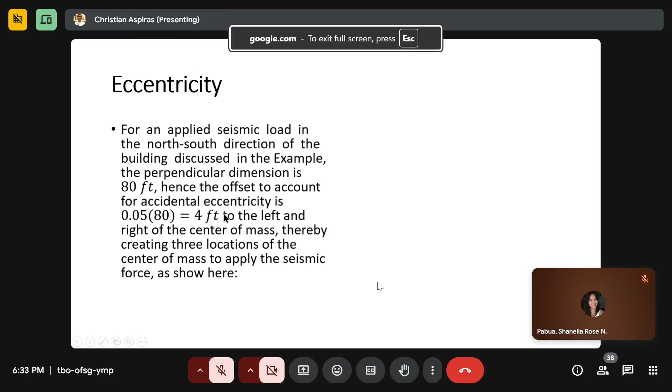So hence the eccentricity is the distance from the center of rigidity. Moment arm as follows. Eccentricity 1.

Once again, eccentricity is the difference or the distance between the center of mass and the center of rigidity. Tulo ka bukang ato, center of mass 31.3 feet minus center of rigidity, 26 feet. So una na itong eccentricity, 5.3 feet.

Eccentricity 2, 35.3, minus the center of rigidity, 26. So 9.3 feet.

And then lastly, 39.3 minus rigidity, 13.3, right? So tulo ka bukang ato ang eccentricity class, no?

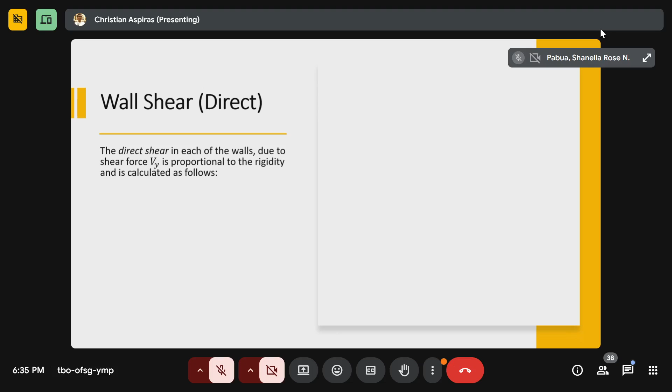So tagsa na to class, unahon na to ning wall shear or direct wall shear, okay? Direct wall shear or the direct shear. The direct shear in each of the walls due to shear force Vy is proportional to the rigidity and is calculated as follows.

Okay, kani? Vy multiply sa ratio between the rigidity, the rigidity divided by the total rigidity.

Rigidity, kaning rigidity is rigidity of the kanang wall, each wall. Maupod sa kanang wall nga perpendicular. This is the wall for the perpendicular wall, at the perpendicular nga wall sa force Vy, shear force Vy. So duha na sa class, direct o perpendicular.

Now, ang rigidity ani this kaning rigidity is zero gini siya actually, di ba? Kay nagsabot naman tadaan na to nga basta the rigidity or the wall is perpendicular sa shear force nga ga-act, ang rigidity nato ana is zero. Taken conservatively as zero. So that means kani nga direct shear is zero ni siya actually.

So sum of Riy and sum of Rix only include the sum of rigidities of the walls that are parallel to the line of force applied. Walls that are perpendicular to the applied force have a rigidity of zero and are not included.

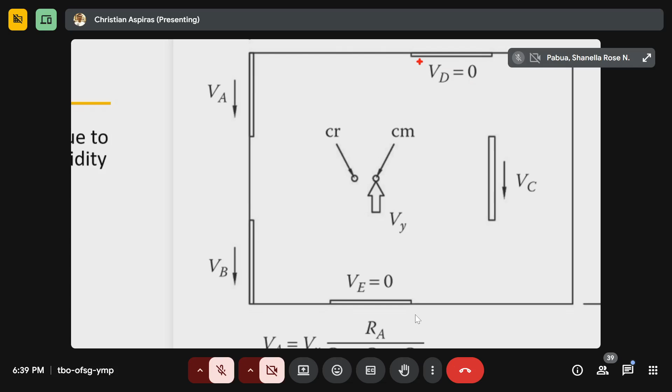So kung ang atong Vy is acting in a north-south direction, paana? Ang force sa Vy, ang makaresistra nga walls are VA, VB, ug VC. While VD ug VE are both zero sa class.

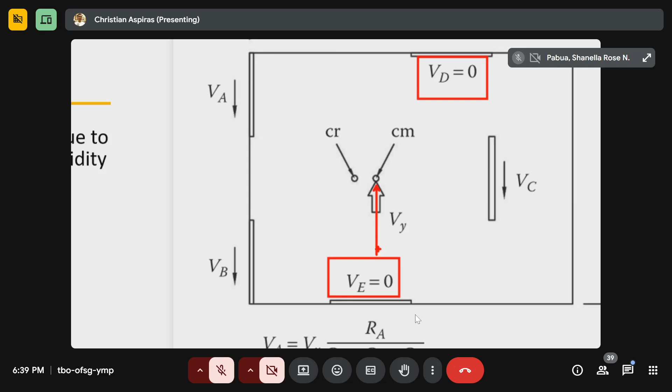Diba? With in terms of kani Vy. Right? So mana sa kaninga example, so kanira ang naay shear, direct shear, direct shear.

So kani siya muna siya ang expanded formula for VA, for VB and VC. No wall A, wall B and wall C. Alright?

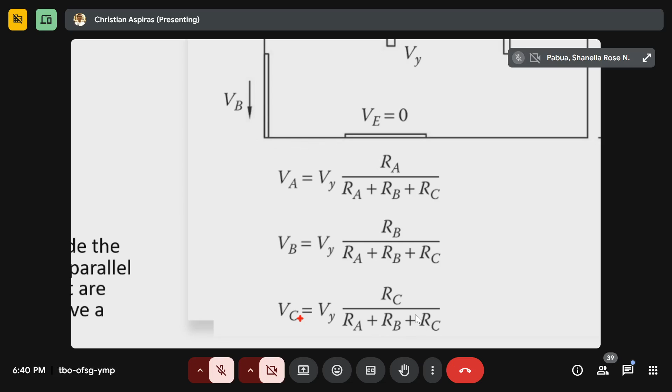Next. Next is sa kaning torsional shear naman, di ba? Direct shear man itong una. Direct shear and then follow ang gitawag na to og torsional shear.

Sa mo puting torsional shear? The torsional shears are due to the eccentric seismic force applied to the center of mass and rotating about the center of rigidity. The shear walls resist this torsional force and develop shears.

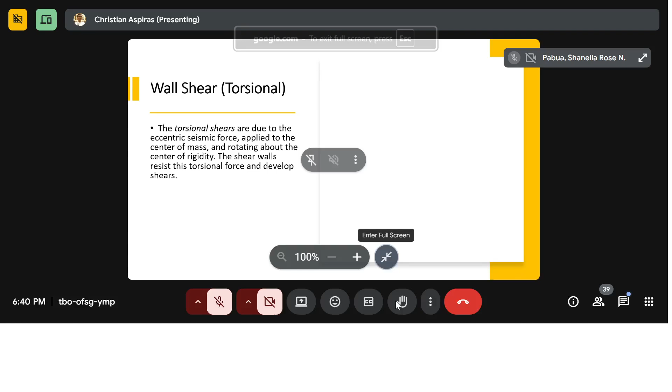So tungod sa katong gitawag na to og torsional moment, so shear magud gyapon ang resistance sa wall nato, di ba? Shear gyapon ang resistance sa wall. So muna nga ang kaning mga walls nato mo resist gyapon ni siya not only direct shears but also torsional forces.

Right? Ang equation naman ana is kani naman ang equation. Now this time diri ma-apply ang katong eccentricity, katong value sa ato eccentricity as well as value sa ato ang polar moment of inertia J.

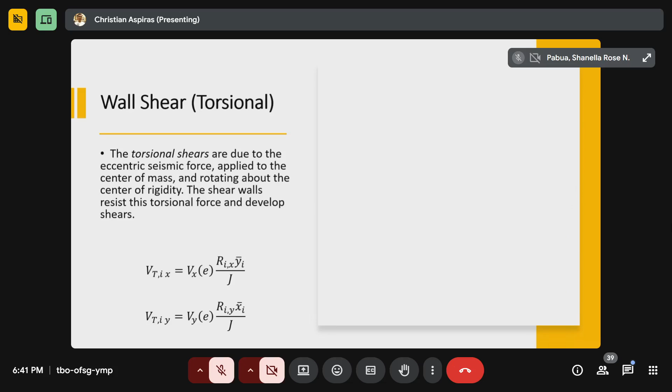O kanina yung y bar x bar, no? Katong difference in center of mass and center of rigidity. Centroid o center of mass, no? Alright?

So to illustrate, let's see the effect now of wall shear or torsional shear. Once again, due to the eccentricity, the presence of eccentricity, a couple or moment is now developed.

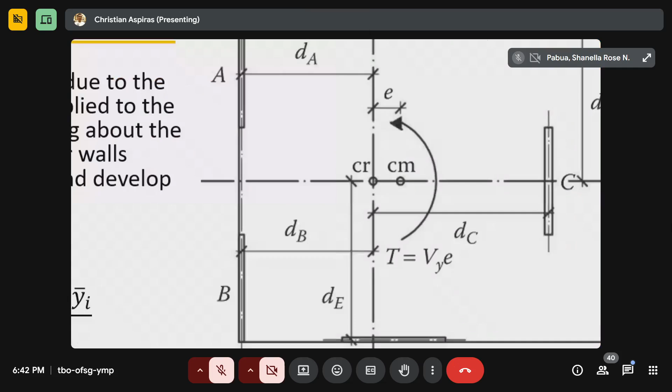Here at the center of mass, we have the shear force and then the eccentricity E. The moment here is V sub Y times E. This is the moment, denoted as T, or the torsional shear.

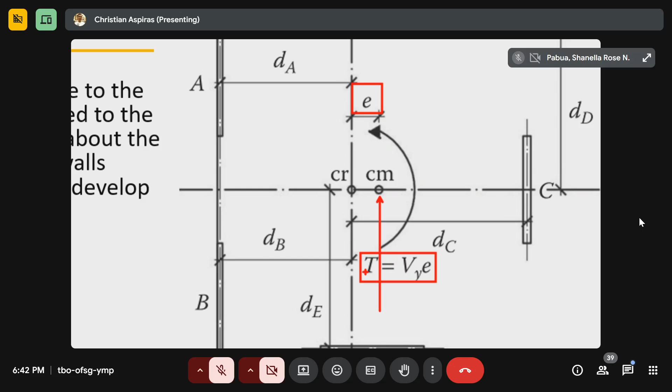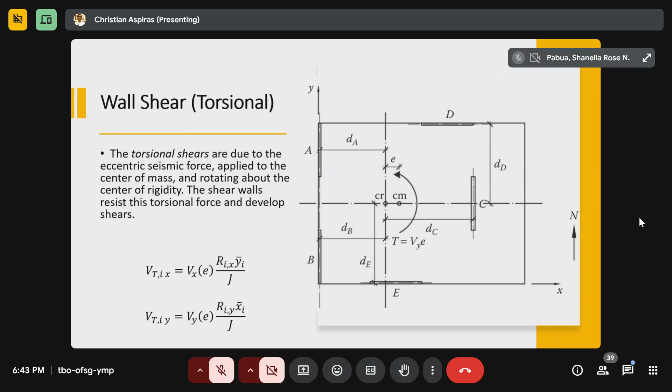Unlike direct shear, in torsional shear class, all our walls are activated. It doesn't matter if the wall is parallel to the acting seismic force or perpendicular, it doesn't matter. All are activated. There's no zero resistance, unlike in direct shear where if the wall is perpendicular, the resistance is zero. So only walls parallel to the seismic force F resist. Right? Are you following?

Once again, here are the equations that will be used.

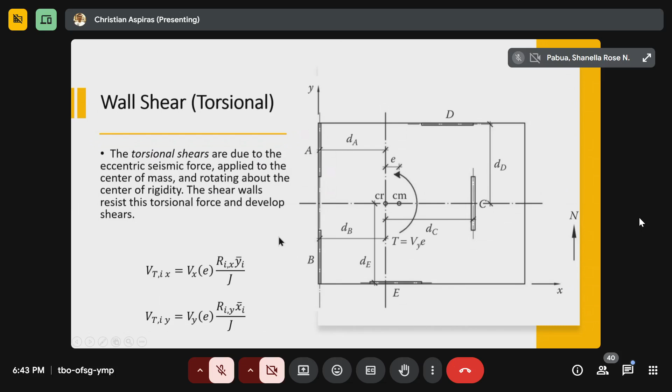So why not let us continue illustrating this by solving the example, using the same building. We won't stray from our example.

All right, but before that, the wall shear, total wall shear, is the combination of both the direct and torsional shear. If you add them, that becomes the total wall shear, class.

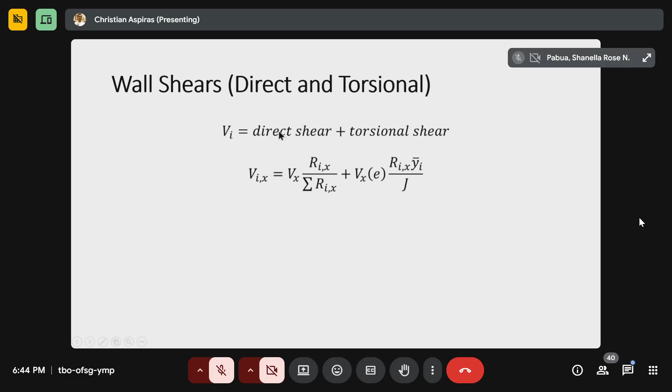So to expand this equation, simply substitute the two equations. This is for the direct shear, and this blue part is for the torsional shear.

So there are still two components for Vx and Vy, two equations, both for the x and y direction.

So for walls perpendicular to the applied force, there is no direct shear. However, perpendicular walls attract shear forces due to torsional moment. So for walls perpendicular to the applied force, the direct shear is zero. But for torsional shear, you must take into consideration the resistance due to torsional shear.

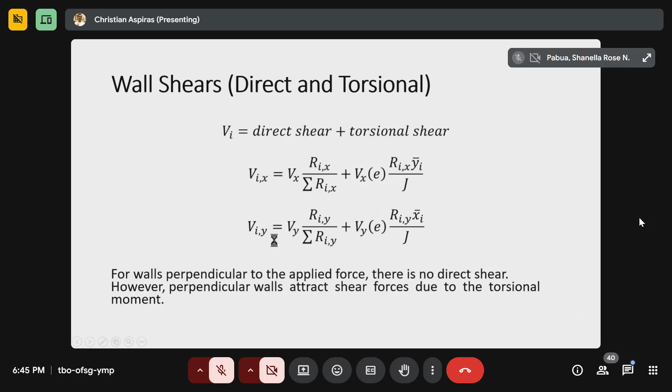Okay, so again let's solve the example using the same building, but this time on a different day, different class. This time, the difference is we use a different J, the polar moment of inertia.

If you remember, the one we calculated was, if I'm not mistaken, 25... 25,000? Yeah, 25,050.7 square foot. Right? So this time, please bear with this example.

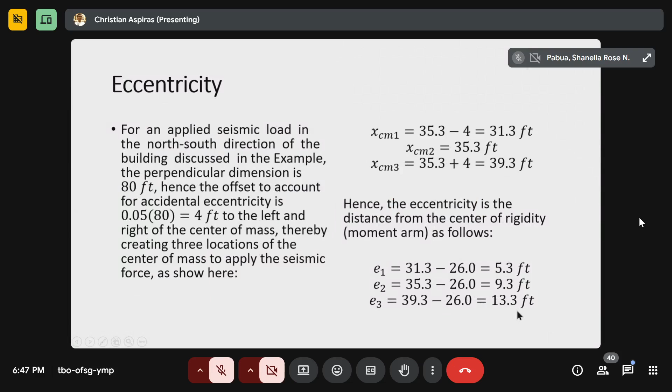So for our example, we'll test only one eccentricity, 13.3, which will yield the maximum shear value since the eccentricity E is in the numerator. So whichever has the bigger value in the numerator will yield a bigger result. Right, class?

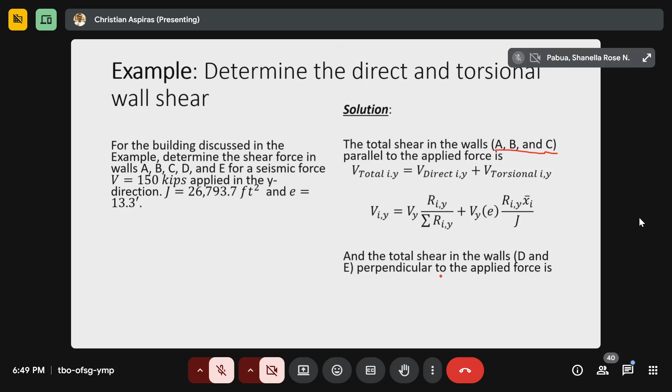And the total shear in walls D and E, below A, B, and C, perpendicular to the applied force, has zero direct shear. Remember, Vy is acting in the y direction, the north-south direction, so the direct shear resistance is zero, but there is a torsional shear value. So this is now the general equation we'll use, class, for walls D and E.

Please take note of that equation. Let's proceed to the next slide where we see the computation tabulated. The tabulation follows the same style and class: the computation of the direct and torsional shears for an applied seismic force in the y direction in a tabulated form.

By now we're already very familiar with these tables: rigidity, y rigidity, and x rigidity, and x bar. These are familiar because we got them from the previous equations.

So how much is this? 42.85 minus 11.3... that's 11.3. Add this up too, class. You get it, right? For the total, add up the direct and the torsional.